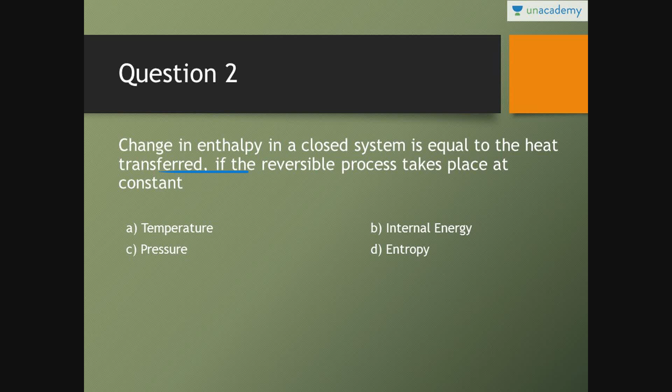Here the question says change in enthalpy. So the change in enthalpy in a closed system is equal to the heat transferred at constant pressure. For question number two, the answer is C. Question three. In which one of the following processes in a closed system is the thermal energy transferred to a gas completely converted to internal energy, resulting in an increase in gas temperature?

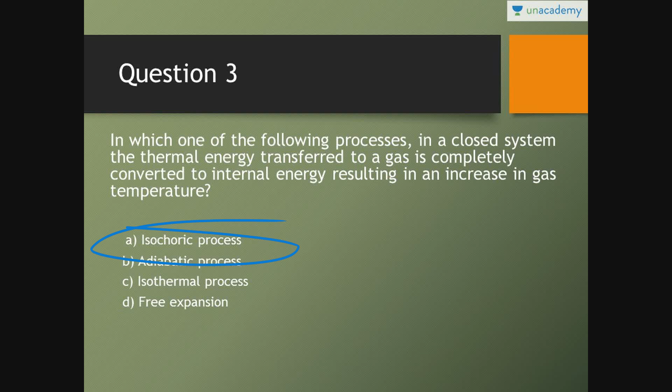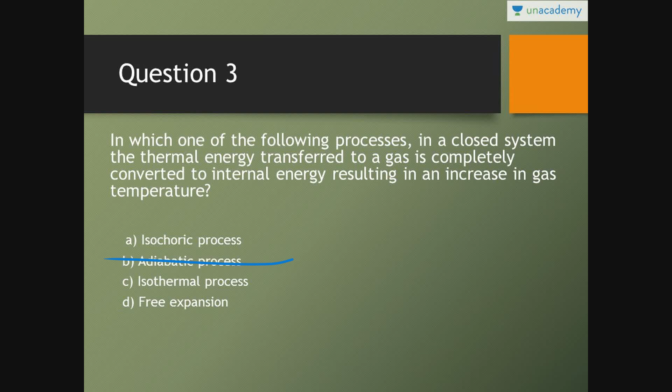See, the previous one was heat transfer equal to change in enthalpy. This is heat transfer equal to change in internal energy, which is at constant volume. In an isochoric process, heat transfer is equal to change in internal energy. B is adiabatic, which is 0. Isothermal, heat transfer is equal to work transfer, and free expansion is altogether different, right? So here the answer is A, which is the isochoric process. The answer key is on the last slide. First of all, try to solve on your own.

Fourth question. There is no work transfer involved in this process. Adiabatic, isothermal, polytropic: for adiabatic we have calculated the work transfer. For isothermal we have also calculated the work transfer. For polytropic expansion we have calculated the work transfer. But for free expansion, work transfer is equal to 0. Initial internal energy is equal to final internal energy. Initial temperature is equal to final temperature. So which process involves no work transfer? Free expansion. In free expansion, work transfer is equal to 0.

Question number five. This process is one in which there is only work interaction between the system and surroundings.

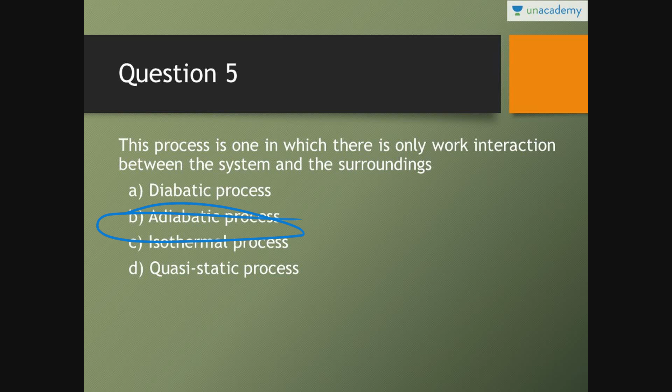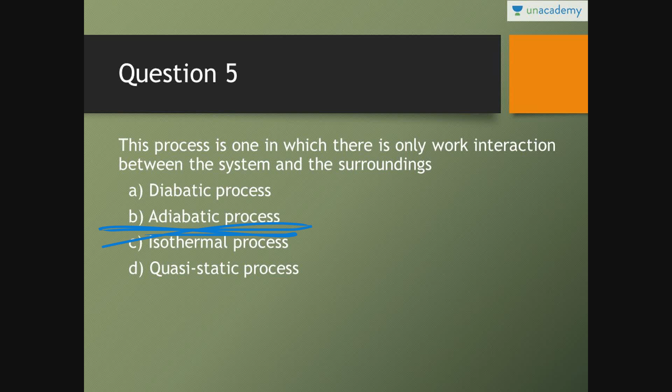Question number 6. Match the list. Different work transfer for different processes. Work transfer in a polytropic process, we have derived the formula for this: P1 V1 minus P2 V2 upon n minus 1. So for A it is 4th. So either option A is correct or option C is correct. B is not correct and D is not correct. So answer is from either A or C.

Work done in a polytropic process is equal to P1 V1 minus P2 V2 upon n minus 1. Work done in steady flow processes. In steady flow processes, work done is equal to what? It is equal to minus VdP. We will see that in the upcoming lesson. In steady flow process, work done is equal to minus VdP.

Work transfer in reversible adiabatic process, P1 V1 minus P2 V2 upon gamma minus 1. In polytropic, P1 V1 minus P2 V2 upon n minus 1. Reversible adiabatic, P1 V1 minus P2 V2 upon gamma minus 1. D. Work done in an isentropic process. Work done in a reversible adiabatic process and work done in an isentropic process, it is 3.

And heat transfer, C, first of all, in C, heat transfer in a reversible adiabatic process is 0. It is given as heat transfer. Sorry from my side. Heat transfer in reversible adiabatic process is 0. And work done in an isentropic process is reversible adiabatic, which is P1 V1 minus P2 V2 upon gamma minus 1. The answer for this particular question is C.

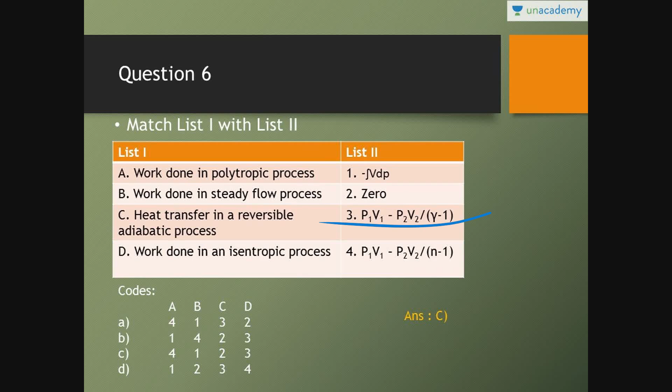Work done in polytropic process, P1 V1 minus P2 V2 upon n minus 1. Work done in steady flow process is equal to minus VdP. Heat transfer in reversible adiabatic process is equal to 0. And work done in isentropic process is P1 V1 minus P2 V2 upon gamma minus 1. So the answer is C.

Question number 7. Identify the process for which the two integrals, integral PdV and minus integral VdP, evaluated between any two given states give the same value. See, it is not isenthalpic. You know the equation for isothermal process. For ideal gas, PV is equal to mRT. m is constant, R is constant, and we have taken the isothermal process, so temperature is constant. So if we take the derivative of left hand side and right hand side, derivative of PV is equal to derivative of constant.

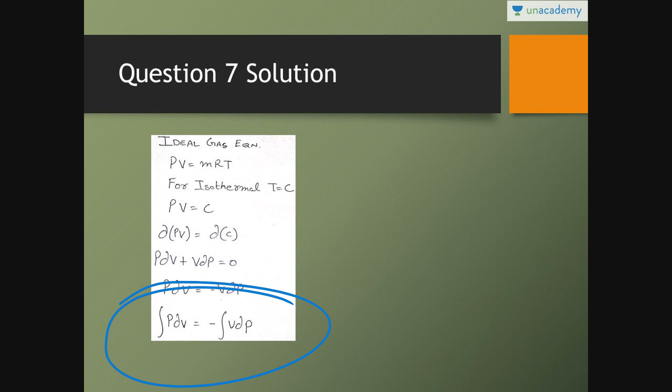Derivative of PV is PdV plus VdP is equal to 0. So PdV is equal to minus VdP. If we take the integral, integral PdV is equal to minus integral VdP. So it is for which process? It is for isothermal process. It is not isenthalpic process. It is not isentropic. It is not polytropic. It is isothermal process.

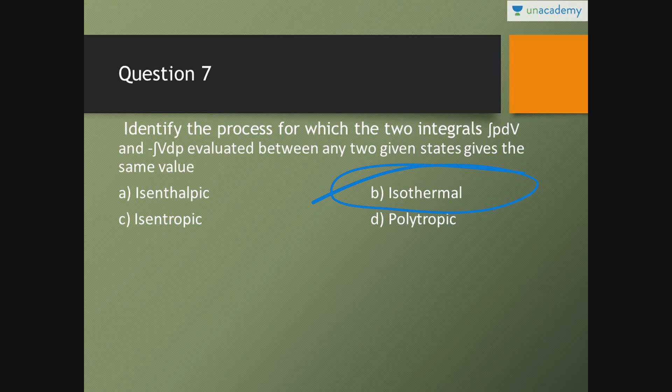Just go through this particular question. Try to solve this question on your own. It would be very simple. The question says two integrals, PdV and VdP. The values are same for both the integrals. Which is that process? That process is an isothermal process.

Question 8. A closed system receives 60 kilojoule of heat. Heat is given into the system, so the value of dQ is plus 60. But its internal energy decreases by 30. The value of dU is minus 30. The first law of thermodynamics says dQ is equal to dU plus dW.

Heat transfer to the system is taken as positive. It is equal to plus 60 kilojoule. The value of dU is minus 30. And then the work done by the system is 60 plus 30 is equal to 90 kilojoule. The answer here is A. So answer for question number 8 is A, which is 90 kilojoule.

See, Q is plus 60, dU is minus 30. dQ is equal to dU plus dW: 60 equals minus 30 plus dW, so dW is equal to 90 kilojoule.

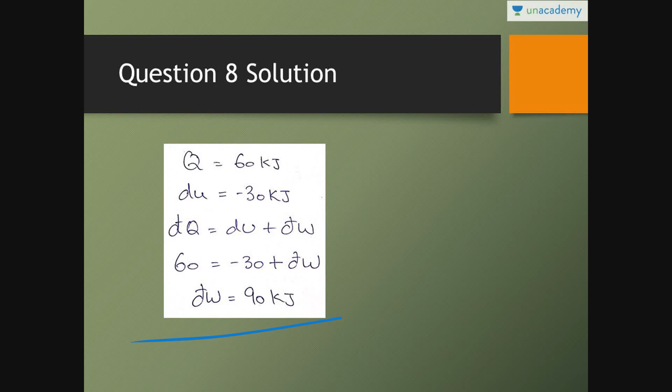Question 9th. This is a very interesting question. The question says, the data given in the table refers to an engine based on Carnot cycle, where Q1 is heat received in kilojoule per minute, Q2 is heat rejected in kilojoule per second, W is in kilowatt. Q1 is in per minute. First of all, convert it to per second, because Q2 is in per second and W is in per second.

If the heat received by the engine is 2000 kilojoule per minute, the work output would be nearly? See, first Q1 is 1500, Q2 is 16.8, W is 8.2. We have to first of all calculate the efficiency for the first part, it is W by Q1. Calculate the efficiency for second, third and fourth, it is W by Q1.

So you will see that the efficiency is same for all, 32.8. For first, second, third and fourth, the efficiency is 32.8. So the question says now the heat engine received 2000, the value of Q1. Q1 is given as 2000 kilojoule per minute. We have to find the work output.

So efficiency is equal to work output upon heat input. So efficiency would remain same, which is equal to 32.8. Work is equal to Q1 minus Q2. Efficiency is same, 0.328, W upon Q1. Convert it into kilojoule per second. So W comes out to be 10.93 kilowatt.

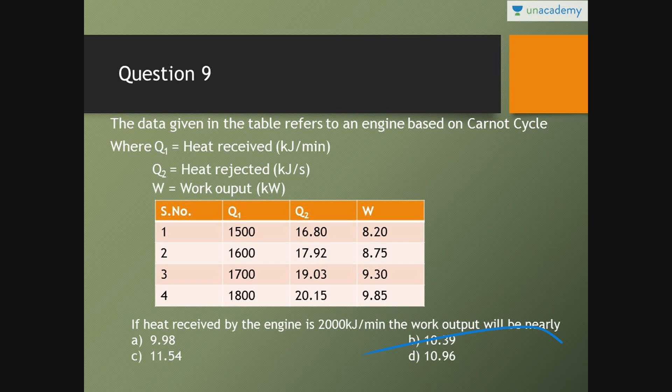Again, the question says the value of Q1 is given in kilojoule per minute. First of all, convert it into kilojoule per second. Then this is the value in kilojoule per second. This is the value of W. Heat received by the engine is 2000 kilojoule per minute, then we have to calculate the work output. So this is the value of W, and this is the value of Q1.

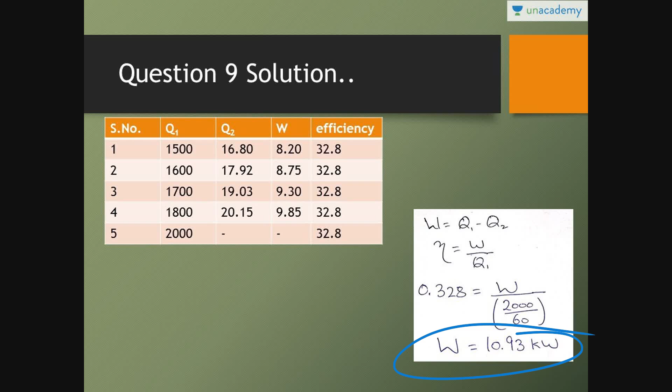Last question. A 4 kilowatt, 20-liter water heater is switched on for 10 minutes. The heat capacity CP for water is 4 kilojoule per kg Kelvin. Assuming all the electric energy has gone into heating the water, the increase of the water temperature is? The specific heat of water is given as 4 kilojoule per kg Kelvin.

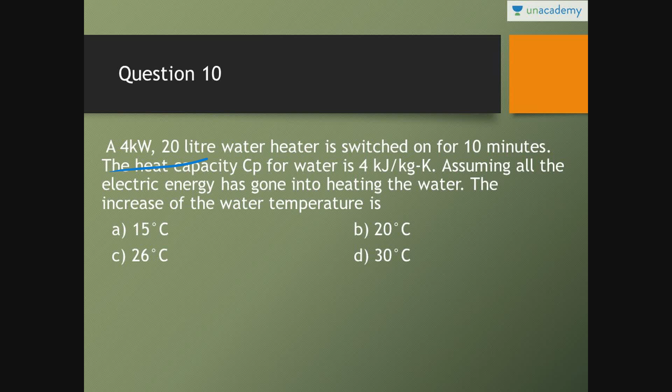Q is given as 4 kilowatt. Density of water we can take as 1000. Volume is 20 liter, which is 20 into 1000 cc. Density is equal to mass upon volume, so mass is equal to density into volume. So 4 kilowatt rating, 4 into 1000 into 10 into 60, which is 4 into 10 into 60 kilojoule.

Q equals mass into specific heat into delta T. Q is equal to 4 into 10 into 60. Mass is equal to density into volume, which is equal to 20. Specific heat is 4. We have to find the increase in temperature. Increase in temperature comes out to be 30 degrees Celsius. This numerical is very easy.

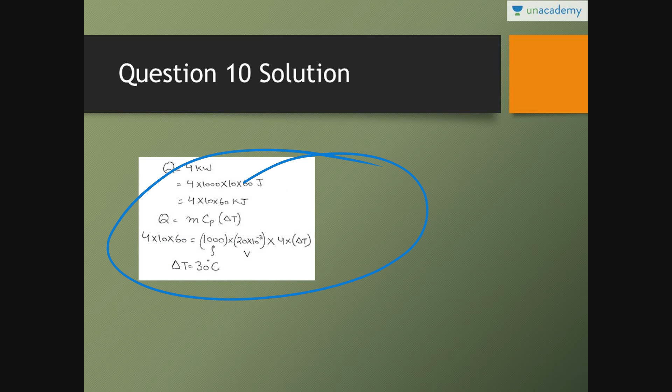You can go through these numericals. If you have any doubt, you can ask me. If you want more of these types of questions, you can ask me. This is the answer key of all the questions.